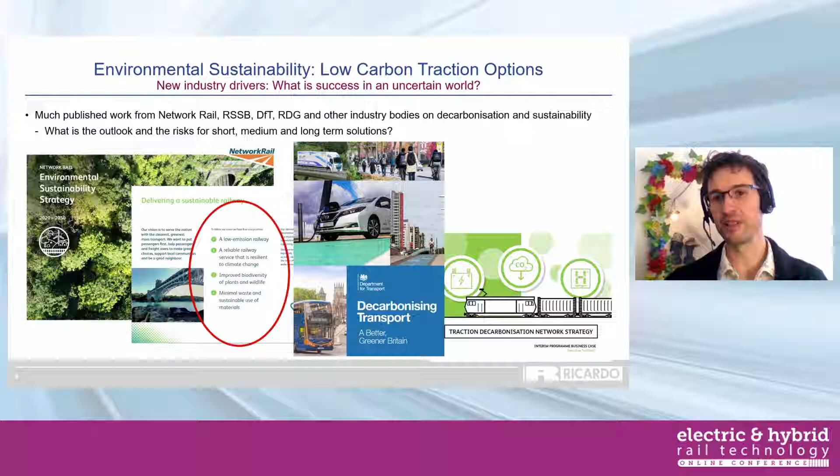What's the strategy for the railway? Well, in the UK we've done a piece of work called TDNS. I say we - Network Rail have, but everybody's fed into it. Within that, there's been an identification that even if we electrify large parts of the rail network, we're still going to need solutions like hydrogen and batteries to take us forward.

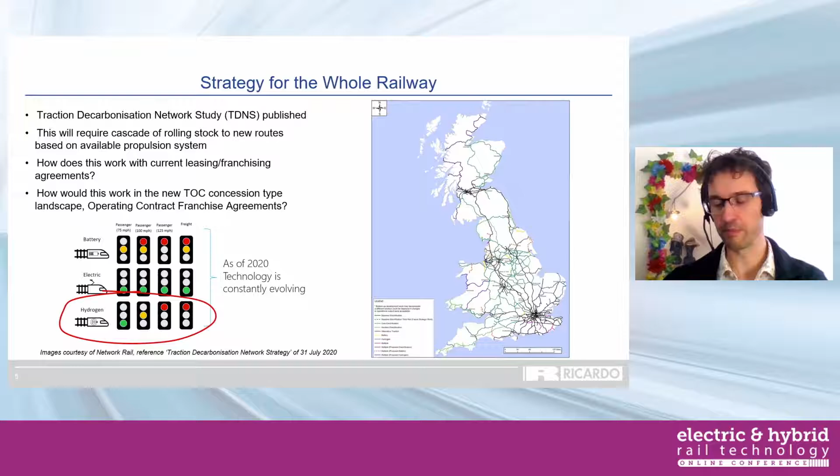So why is it so difficult to implement these things in rail? We've seen it in automotive and commercial vehicles and so on, and they seem to be ahead of us in a lot of cases. Rail is a very heavy industrial environment - the duty cycles and the requirements of use in rail are very demanding.

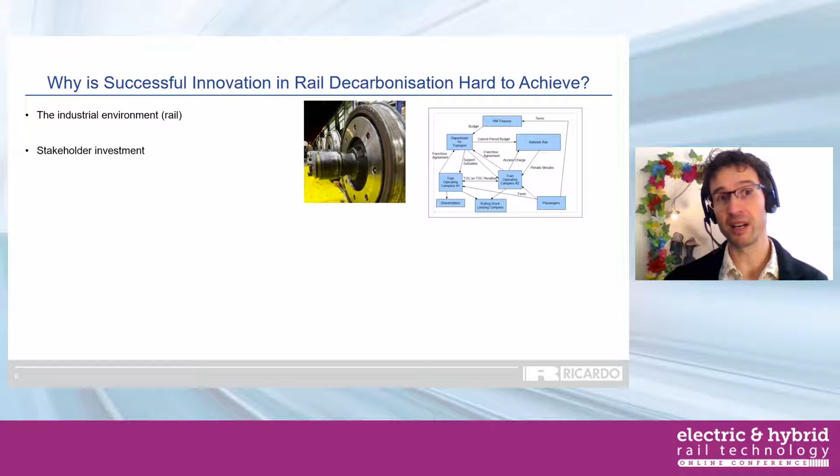Rail often has a very complex stakeholder investment makeup. It's quite like the marine industry in many cases, where you have owners who are not the operators, operators who are not the owners, government intervention, and so on. It's very difficult to invest securely in that type of environment.

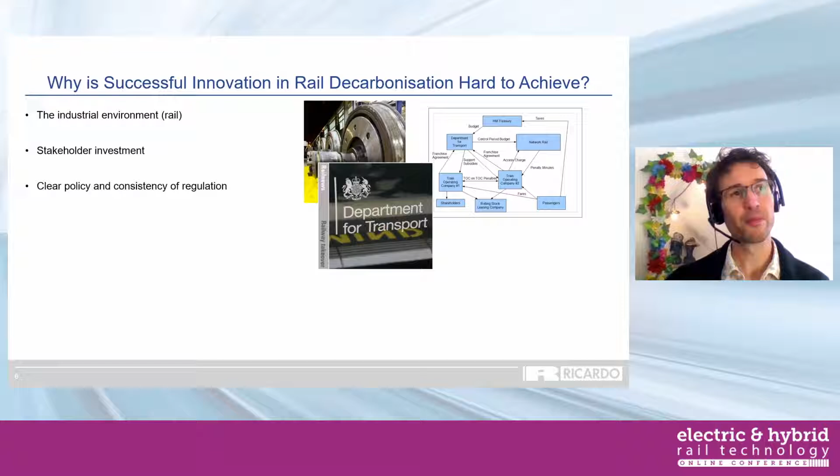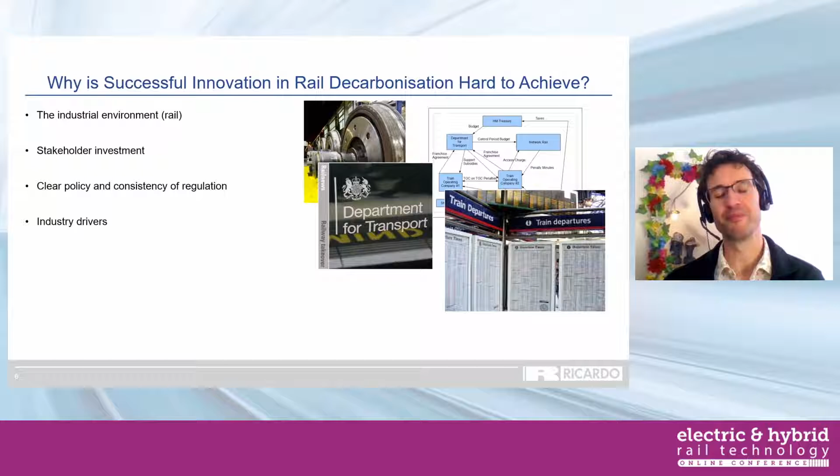Clear policy and consistency of regulations - they're changing. We're also, let's be honest, something of a political plaything at times. And that links into the industry drivers - they're often changing on a reasonably regular basis, depending upon the political flavour of the month.

Taxation, charging, incentive schemes - can you operate inside urban environments? These are all being placed into rail as well, but there's uncertainty about them and when they're going to come in.

And finally, we have things like standards creep. We developed a set of standards to ensure the safe, compatible and reliable working of a rail network. That creep of standards is something that's built up over 200 years while we've tried to develop safety within the rail system. So there's a lot of demands and standards that need to be put in place before we can put something into service, which makes it expensive, difficult, and time consuming.

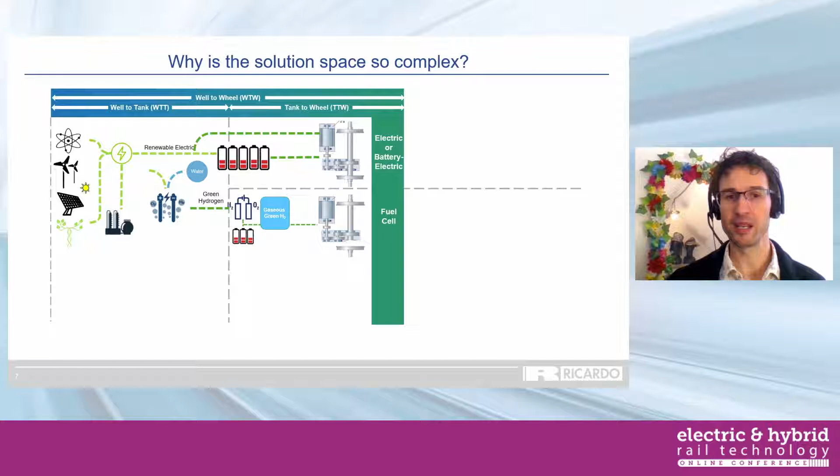So why is the solution space so complex? We've gone through most of this today, but effectively we have a variety of sources of energy we're going to generate in the future. From that, we need to use that in one way or another. Directly using the electricity is the prime route forward, but if we can't directly use it, the next best thing in terms of efficiency is probably to store it in batteries as chemical energy that we can use directly. If we have to, we can convert this into hydrogen, and use that hydrogen in combination, typically with batteries, to run. But we can also use the hydrogen as a fuel for an internal combustion engine, or use that hydrogen to create other synthetic fuels and run those in a combustion engine, or biofuel those combustion engines.

So what are the issues? These are just rule of thumbs, but you can see some of the issues in terms of mass and volume that we have to accommodate within our already very constrained package environments in a rail vehicle. And that's really the nub of the issue.

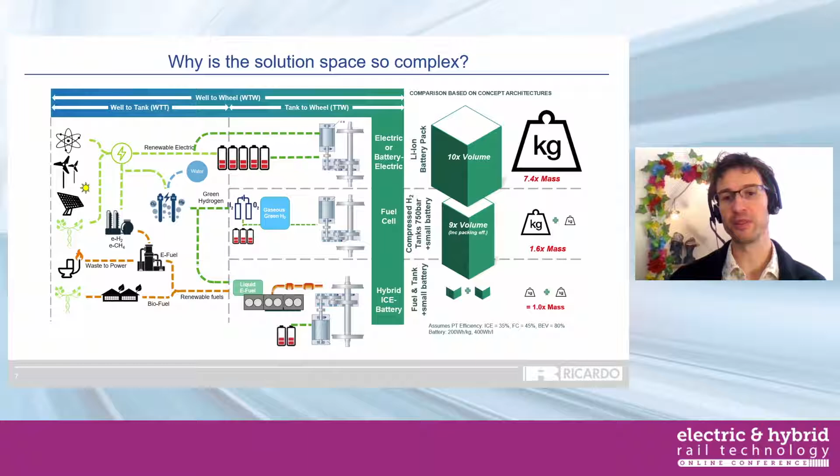We've gone through that a number of times today. We want to maximize the space for our passengers. We are quite constrained with the available space on vehicles for putting this stuff, particularly in the UK, where we have a smaller vehicle gauge than a lot of Europe. It's difficult to stick stuff on the roof, for example. So these are all issues we have to overcome.

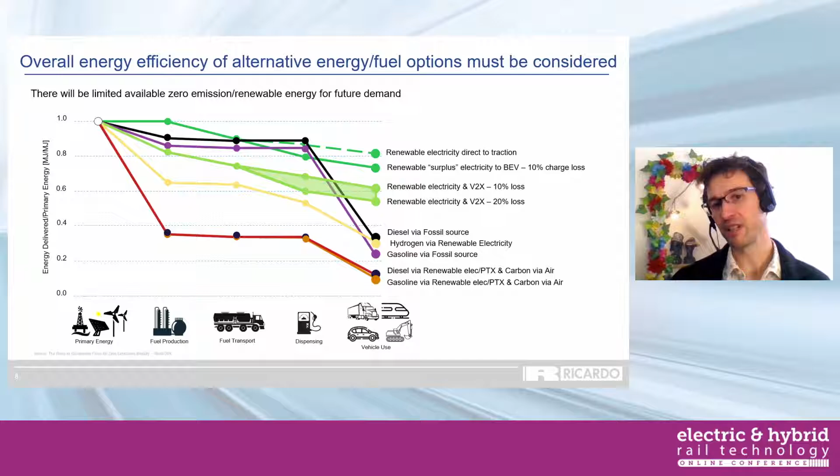And something we've talked about a number of times - the most efficient way to use the energy. There's going to be a limited amount of this energy as we transition away from fossil fuels. We are going to have to produce more energy to support the transportation network. Added to the growing industrial and domestic energy demand, that all puts a lot of constraint on our system, so really we want to use it as efficiently as possible.

So all of that has to be backed up and supported in our decision process by understanding the technologies, the rates of maturity of these technologies, what we can expect from them, and what their level of development is, to help us with those decisions. Do we do something now? Do we put off doing something for 5 years, 10 years, or so on, until the technology is at a suitable level of maturity?

So what does that mean in terms of hydrogen in rail? I'm very much of the opinion there isn't a particular solution, like everybody else has said today. Hydrogen is going to be in the mix as something that is going to help us on this journey. It's not the be all and the end all by any stretch. It's going to be a niche application in the most part for rail, but it's still going to be something that's needed.

But it might work in terms of looking at future connected cities. It may work where there are other demands for hydrogen, so heavy duty transport on roads and logistics, perhaps private taxis or hydrogen buses where batteries won't do the job as well. So looking at integrated transport systems.

We also need to understand what our energy systems are on board. We've talked about electricity and batteries and hydrogen, but we've also got biofuels and biogases, potentially even mechanical or cryogenic energy storage systems.

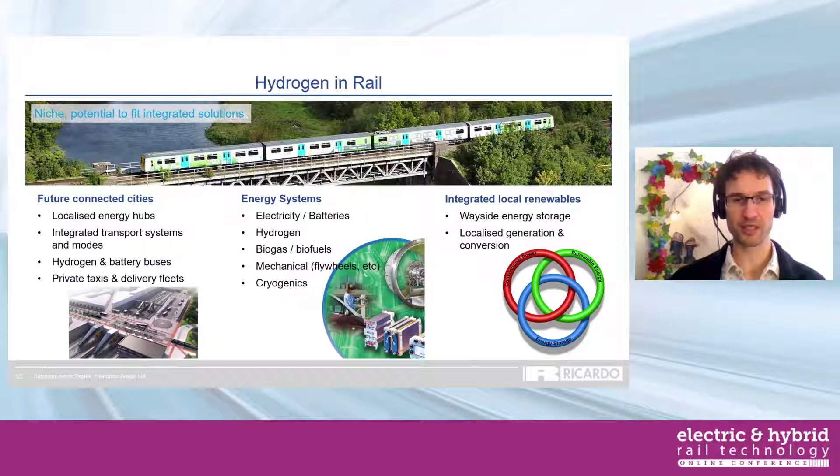And we also need to know about integrated, local renewable energy systems. Are we going to generate energy on site with local solar PV or wind power, or other hydropower schemes, and so on? How do we integrate those into our network? Hydrogen can play a part in all of this as an energy storage system, an energy vector that we can use to help transmit and store that energy we're producing.

So I think we've gone through the why hydrogen, but where in rail particularly it fits is, as we've said today, long distance, high energy consumption applications. So rail is one, heavy duty trucks, bus, coach where they've got to do long journeys, aviation, and marine.

Centralized hubs are going to be most likely where we produce at large volumes, and then we share that centrally across a number of different transport modes, perhaps at typically distribution centers where you might have a rail terminal, a heavy duty goods terminal, and so on. So that link is likely, airports, out of town destinations where we can fuel central fleets, and it's likely to have other hydrogen users.

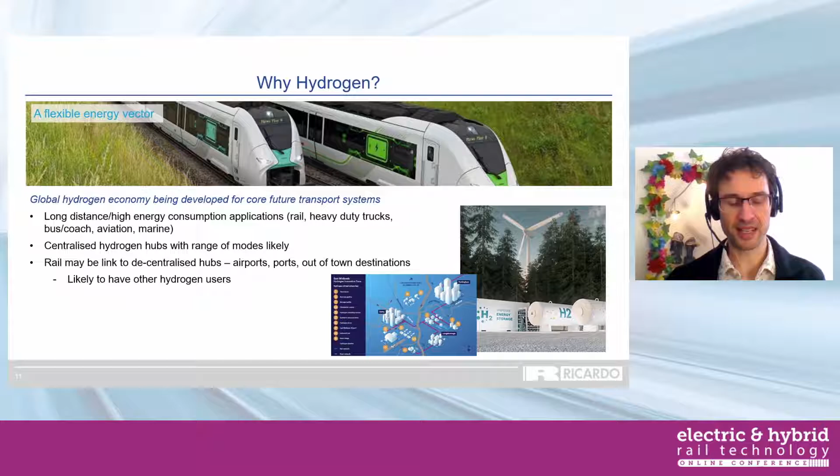Will hydrogen on its own in rail make a solid business case? Possibly not in many cases, and that's where we need to be thinking a bit more holistically about the whole transport system.

What are the options when we have hydrogen, and this is where we're getting into how do we utilize it. So hydrogen fuel cells, I think, definitely the future. They generate electricity directly and fit within our electrified propulsion system platforms. They're quiet, zero emissions at point of use, so great for cities and urban environments, and they've got good quoted efficiency.

Alternatively, we also have hydrogen combustion engines, burning the hydrogen in a combustion engine. What are the advantages of that? It's a stable and known technology. It's very tolerant of poor hydrogen quality, which we have quite a bit of at the moment. It's robust to poor air quality, whereas the fuel cell can be quite sensitive to operating in dirty environments, and it's durable and reliable.

We know the technology. We have a supply chain geared up to working with internal combustion engines, whereas all of that's still not quite there with fuel cells yet. Ultimately, the fuel cell technology hasn't really been proven to be mature yet for a rail application, and it also doesn't have a mature supply chain to support it. Whereas with the hydrogen internal combustion engine, we see quite a mature supply chain in place, and the technology potentially being readied quite quickly, to a point that in a couple of years we can develop a pretty robust product, whereas fuel cells, the development cycle has been going on for 30, 40 years, and we're still not at that fully robust product yet.

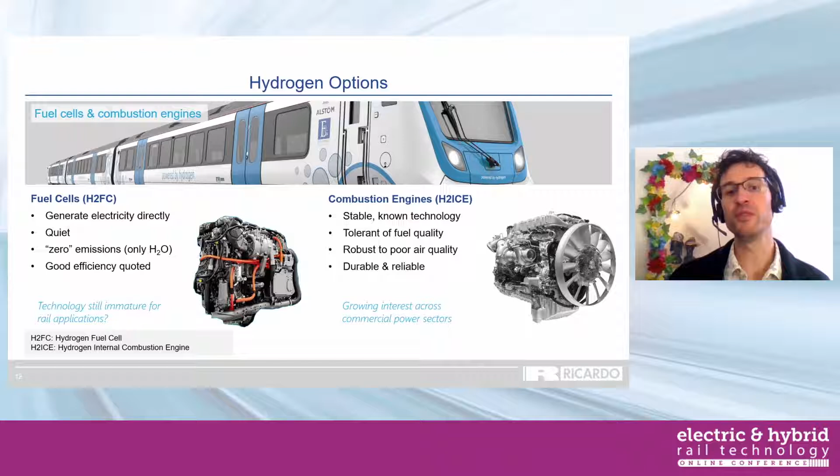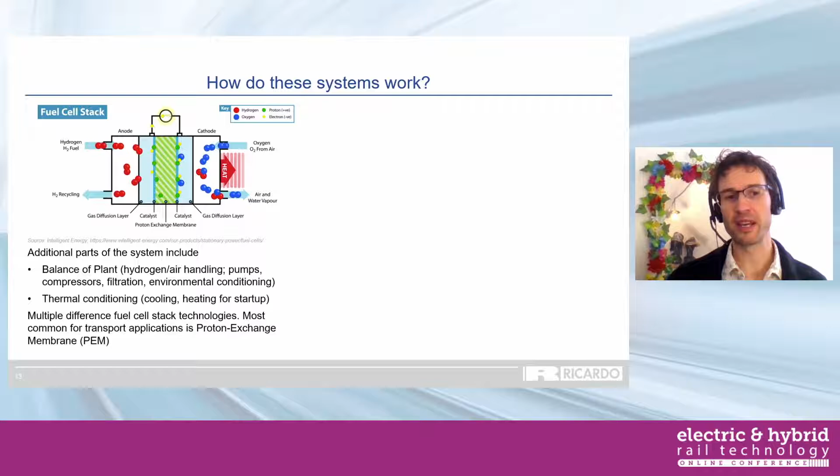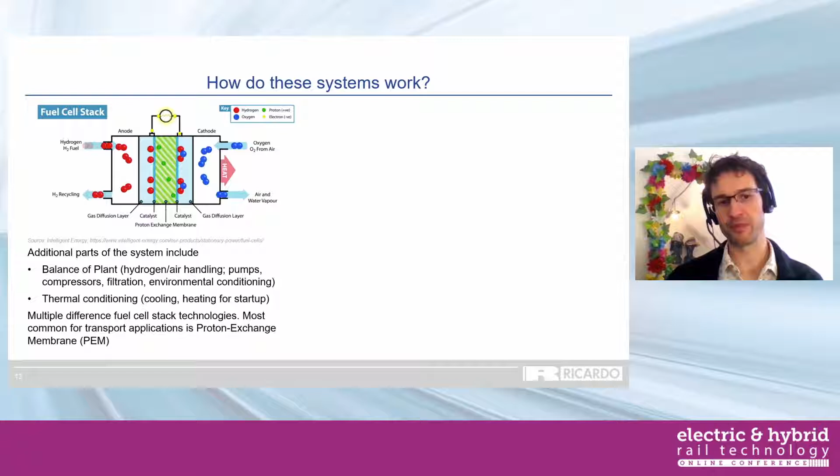Very briefly, how do they work? I won't stop too long on this, but a fuel cell stack is a chemical energy production using proton and electron, a proton exchange membrane. Typically there are some other solid oxide fuel cells and so on, but PEM is the technology really for rail vehicles that we're seeing. We need some additional pieces of the system to process and manage the air and the hydrogen that you need, and to cool it and so on. Some thermal conditioning, but that's generally it. Very few moving parts apart from pumps and so on, and it's quite a simple system.

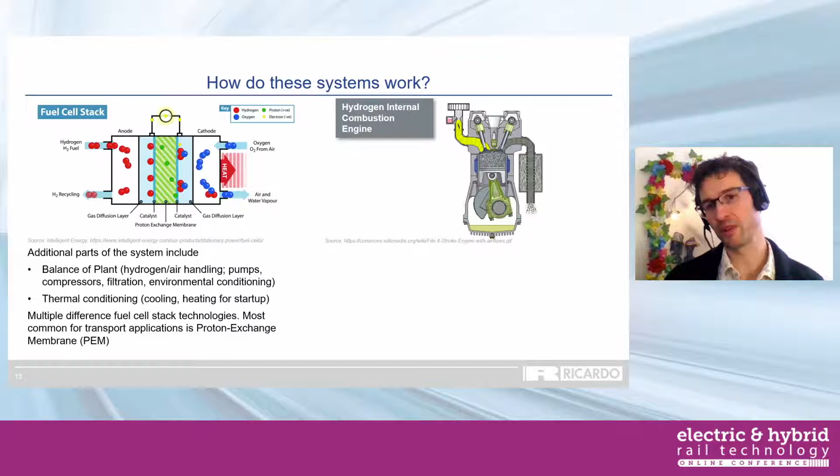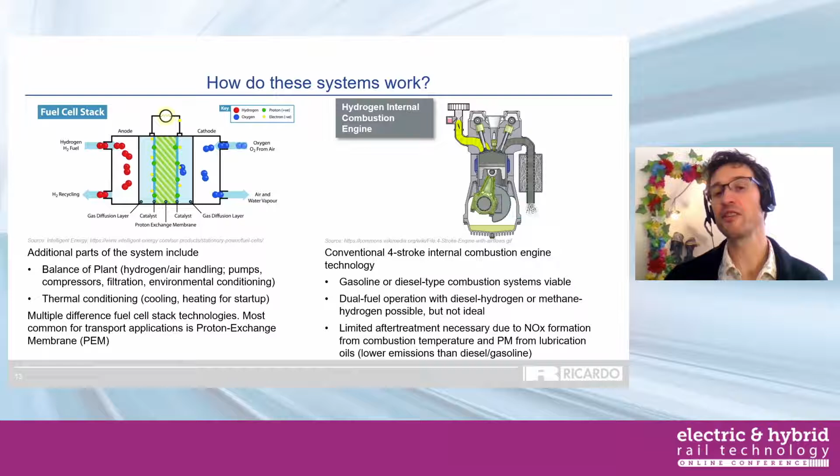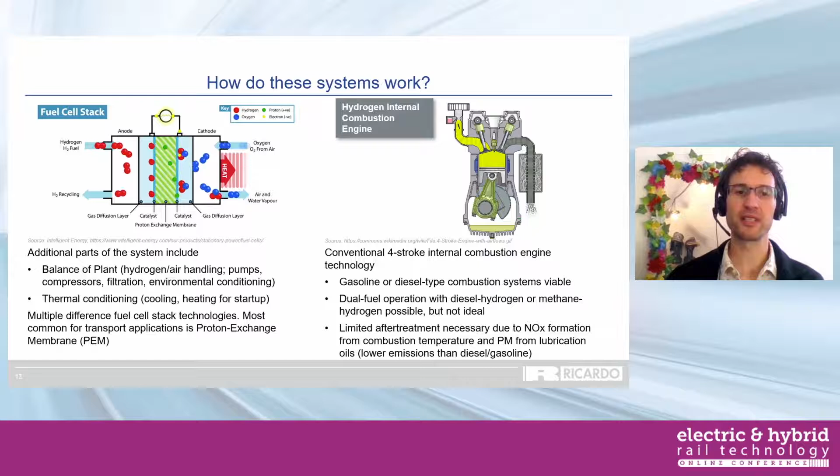Internal combustion engines are much more complex systems, but we know them very well, and we've spent a long time developing them, so they're pretty robust now after 100 years of development. They are conventional four-stroke cycle, running in hydrogen mode, a spark ignited 100% hydrogen combustion system, very similar to a gasoline engine. In hydrogen, we're likely to need some after treatment to clean up the gases. There will be some NOx from the high temperature of the combustion. Shouldn't be much in the way of particulates, because it's a gaseous fuel with no impurities in it, although we will burn some lubrication oil in there, so that will give us a small amount of particulates to deal with.

What's the difference? Hydrogen fuel cells theoretically are more efficient than a combustion engine. When we're running them in the most efficient mode points, which is typically between about 25 to 50% of total system power, then we get a really good efficient system.

The fuel cell on its own will run at about 60% efficiency at the moment. When you add in all the other bits and bobs that need to go with it and the conversion into motive power, we're looking at about 50% as a peak efficiency, which is pretty good.

An IC engine, on the other hand, will be lower efficiency at those part load conditions, but where they're running at high load conditions, 70-80%, that's its peak power efficiency or peak efficiency range, they're going to be pretty comparable to a fuel cell system.

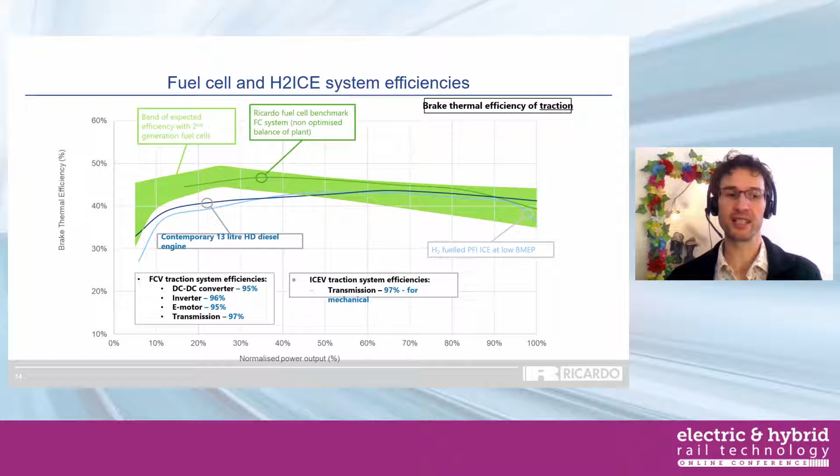What we can't do with an internal combustion engine that we would be able to do with a hydrogen propulsion system is recover regenerative braking energy, because with the hydrogen fuel cell, you'll typically have a battery alongside it where you can recover the energy, and we don't typically have those with internal combustion engines.

One of the key points, though, is, at the bottom, price. At the moment, the price of a comparable fuel cell system is significantly higher than a comparable internal combustion engine. And that's really one of the points at this time for the commercial type of decisions moving forward.

What we also have when we've been talking about the environment and so on is we don't have a requirement for those, if you like, environmentally sensitive batteries in terms of the minerals and materials you need to create them. The materials for creating an engine are very simple, very sustainable, and very recyclable as we are at the moment.

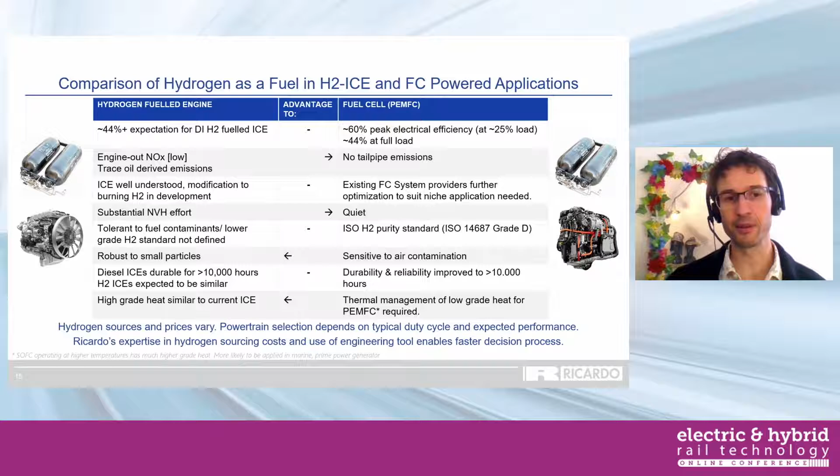So is it the right time for hydrogen internal combustion engines? I think at the moment, the technology is relatively proven and robust. What's interesting is you can convert your existing hardware.

So we have a whole fleet, thousands, hundreds of thousands globally of diesel engined rail vehicles, many of which are relatively new with emissionized diesel engines, particularly when they're large, expensive engines in locomotives and so on. That's a very big commercial risk to throw that engine away and try and replace it with a completely new propulsion system. If you can convert that, that's significant saving.

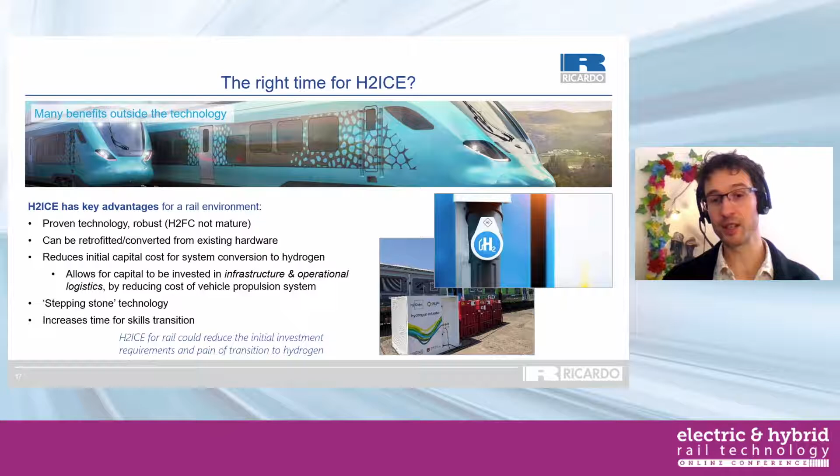For new trains, if we're building a new passenger train, for example, yes, a fuel cell is a perfect application to do that, in limited numbers, if we can make the commercial case make sense. But for the existing fleet and for those locomotives that we've got running around everywhere, then potentially hydrogen internal combustion engines are actually going to be a much better solution in the short term, until we're looking at 10, 15, 20 years down the timeline when we're looking to replace those assets.

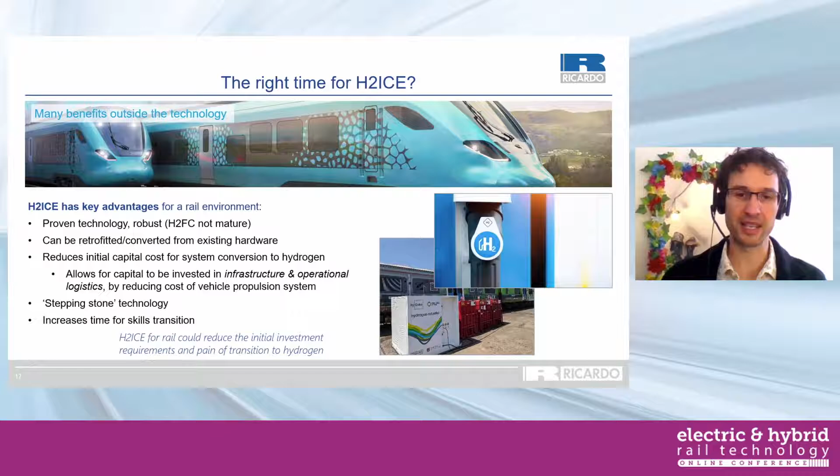So what are the challenges and opportunities? Safety, safe use of hydrogen in rail, is probably the biggest challenge we have. Technically we can make it work, it's all about sensible and robust engineering, but safe use is the risk everybody fears. The rail system has to be entirely as safe as it can be. We aren't scrutinized in the same way road transport is, for example. People die on the roads every day. People do not die on the rails every day. That's a very different paradigm we have to operate in.

Onboard storage and volume, cost and supply of hydrogen are clearly still issues.

But where are the opportunities? What does hydrogen help us with? It reduces potential costs of grid connectivity. It can be 50 million plus to connect a high power grid connection to provide traction energy for rail, and that's just not feasible on low utilized lines. It can support a multimodal business case for hydrogen hubs. It facilitates building new renewable energy production schemes where you can't necessarily connect to the grid, but you've got plentiful renewable resources. And rail can provide a consistent consumer for the supply chain, giving guaranteed investment or guaranteed end customers to support their investment decisions. So there are definitely pluses there for us.